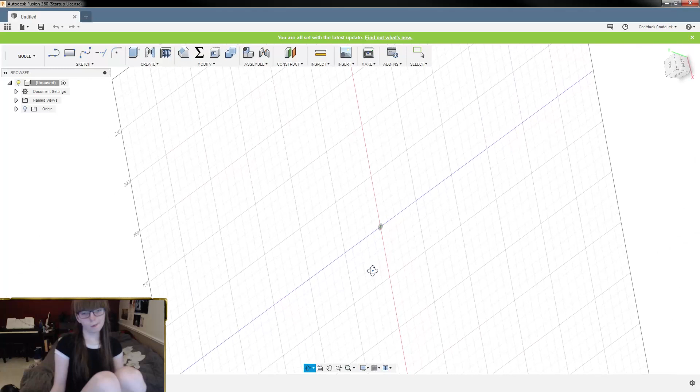Oh, did I? I've gotta have one on my desk. Sure. Did I forget to grab one of the key components that I'm modeling this off of? God damn it. I did. That's fine. I've gotta know where, like, at least 2 of them are. Yep, okay. Don't worry, just had a dummy moment. Auto pusher.

Ravens are love, ravens are life. Thanks, Bree. Also, hi, Bree is what I meant to say. I mean, thanks regardless, but what am I talking about?

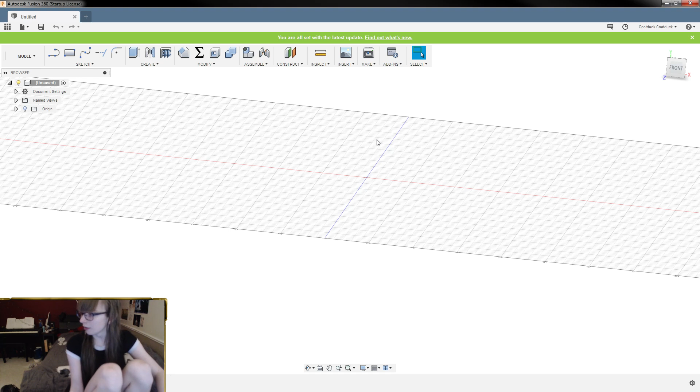And I forgot the Rayven over there. I'm very organized, very prepared. Will this be released? I don't know. I haven't even designed it yet. Give me a break.

Okay. So, let's start off. So I got a Rayven that has been modified. If you hear things rattling around, it's actually got big crystal clear parts in it, because he's such a painfully nice dude that he sent me an extra set and a half when we did Gaben.

But alright, so it's got a little bit of a burr on the outside. I don't want that interfering with my fit up, so we're gonna clear that little section up.

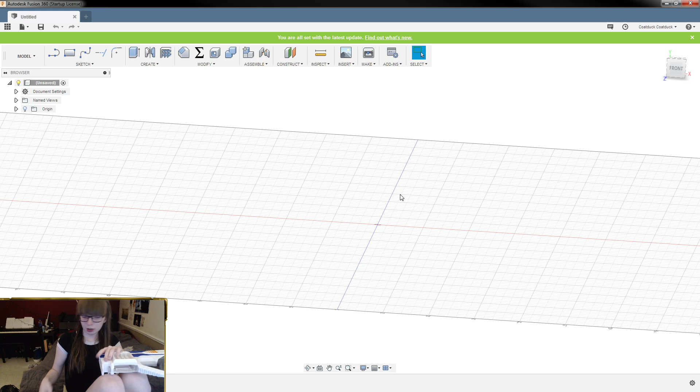Extra muzzle or triggers and rails. I think he sent 2 of everything, and then an extra muzzle and battery, or jam door, I think. I'm not entirely sure. Although I am missing a rev trigger on this one, so it's possible he only sent me 1 extra of those, or 1 of those, I guess.

Good thing you didn't need to go to the supermarket. That sounds like you saying you needed to go to the supermarket, and then I got in your way.

Alright, so that edge is cleaned up. Now let's grab my calipers and start grabbing some measurements off of this. Oh. Okay, so this is 48 millimeters across. Right.

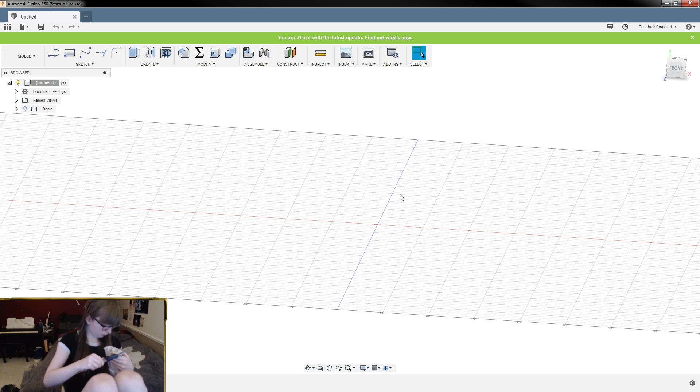Oh, I'm sure I've got a mag laying around here. If I have to get up and get another piece, I'm gonna feel like a real moron. And here I am feeling like a moron. There we go. Mag. We want the pusher to sit at the right height. So mag with a dart in it. Oh, I didn't. There's no spring in this. Am I a big dummy?

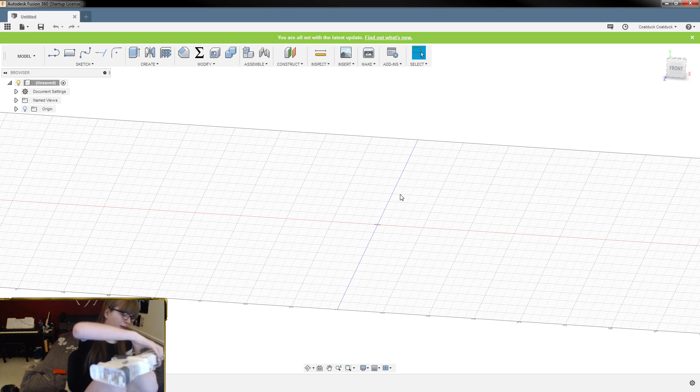Oh, right. The way the Rayven shell works, it has to be screwed together there. Now, I know that comes down on a switch, but I'm not entirely sure where that switch is. And the shell's screwed closed. Of course it is. See, I'm trying to figure out what I have to get rid of and what's necessary.

So, for a sense of context, let me pull up what we're going off of here, because I have a design in mind. So, the purpose of this, now that we have enough people here that I don't have to explain myself 8 times, so the purpose of this is, Rayvens have a useless battery tray. Like, this is not good for a lipo.

Yeah, so, oh crap, where is this? It's gotta be in this folder. There's so many. Alright, there we go. So, I don't know if you can see that. Open the Photoshop file. Oh, that's bizarre. Why is it not showing me layers? Was that to do with that error that I just... Okay, no, it's fine.

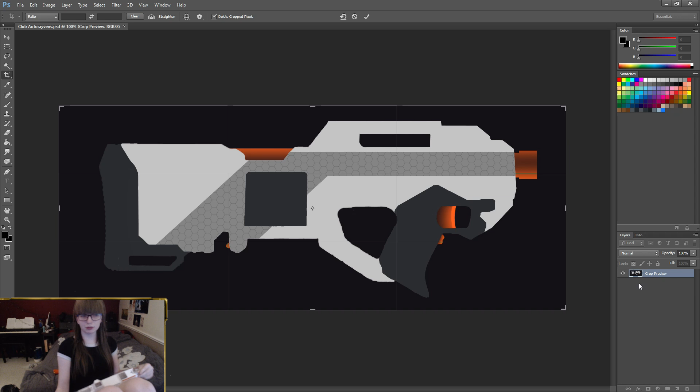Let's take out this background here. So, this shape is roughly based off of the Zeus. Complete brain fart there. But, of course, we can do whatever we want to it. Since we're 3D printing it, we can change and modify it, but I really like the shape and I like the length.

But this is going to mean that we can put in a rapid strike pusher, so you can do an auto conversion if you want to. And it's also going to mean that you can put a lipo in the back, because the bottom is going to be unscrewable, and you should be able to just slot a lipo in there. However, the Rayven is not wide enough to accept the pusher as is, so we're going to have to widen it out and give it a cheek rest.

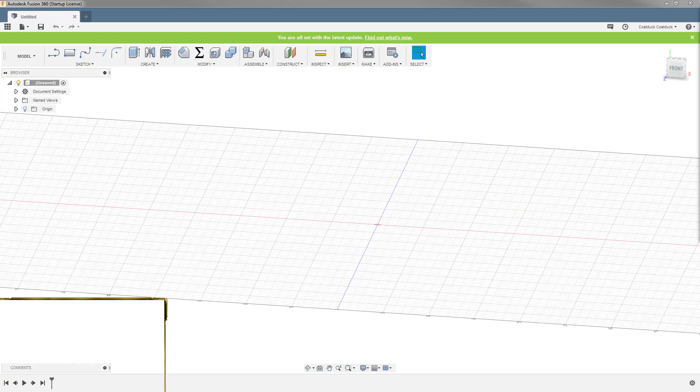I can't do shell modification one-handed, and I'll be fucked if I'm letting this get cold. So let's swap over to CAD and start modeling the back half of the Rayven.

Okay, so basically, what I want to do here... God damn, this is good. What I want to do here is, the Rayven, if you look at it and squint at it a little, it has a distinct profile. So this angle, this looks like it's about a 45. I'll measure it to be sure. Then a drop here, and that drop goes all the way down to a rotation here. So all we have to do is get this profile imported, and then we can design around that based on measurements of how far in we want it to go, etc. Because we've effectively cut away all of the stupid little bumps and whatever.

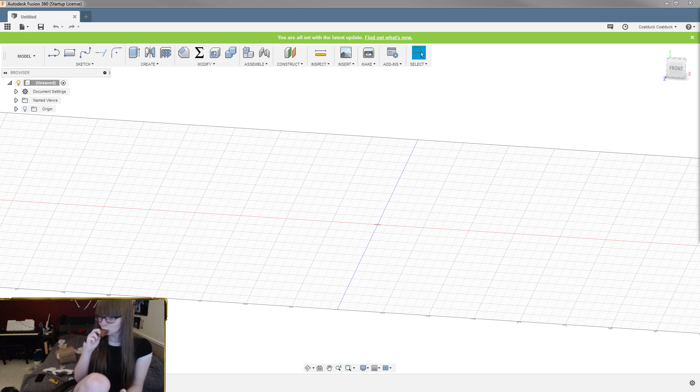At some point, I may want to grab one of my Zeuses and get some measurements off of that. But to be totally honest, no part of this has to actually be a Zeus. Like, I kind of want it to look like a Zeus because I like the way that that looks and I like the way that the two shells work together, but I'm using the wrong hand for this.

Thanks for stopping by, Corv. Oh, I have miso soup too. God damn.

Okay, so we're looking at the front right now. So, oh fuck.

Gotta go watch Primer. That's not exactly light viewing material.

Okay, so I want this to be more or less centered. Although it is tempting to center it around the bore. That would be kind of a pain in the ass, though. Actually, no, it wouldn't.

Don't mind me, just got a Rayven and a piece of Galbi in... What's that? My flowers. There they go. There they are. Here we go. It's a me. Difficult to do one-handed.

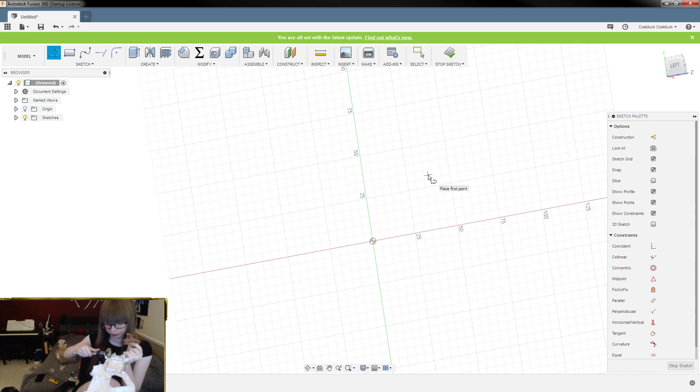Okay, so what do I think? That's 18.5. And then we want to subtract approximately half of the width of that hole. Keep in mind that it's a little large. So we said that was 18.5, if I line that up down. Yeah, okay, so 18 and a half.

Something's not right there. Oh, because it doesn't quite line. 20 and a half. Okay, so 19 and a half is what we're looking at. And that should center the top on the bore. 19.5.

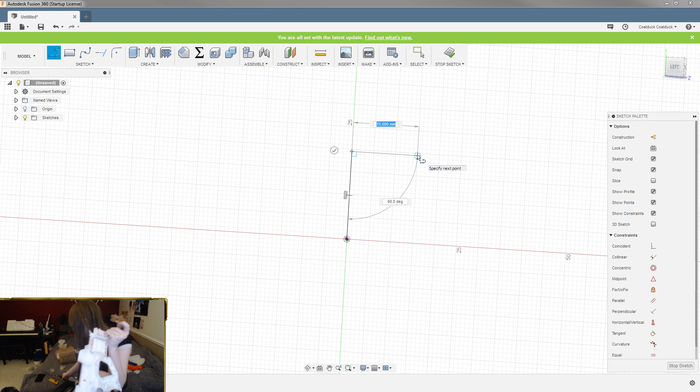I don't know what you're using a micrometer for. But if it's for Nerf stuff, I have used a pair of $20 calipers from the start. And it's fine. It's not incredible, but you don't really need incredible. Even if you're doing really high precision stuff, you don't need incredible. High precision by Nerf standards is like, you know. Again, if you're measuring Nerf shells, you're better off with a pair of calipers rather than a pair of micrometers. At least in my opinion. But there are some talented machinists out there, so I won't. Yeah, you're young.

Did I just do something horribly wrong? Because I'm getting 48 millimeters there. And then when I split the shell in half, unless it's super duper asymmetrical. Okay, no, that's 24-ish. 24 and a half, which is concerning, admittedly.

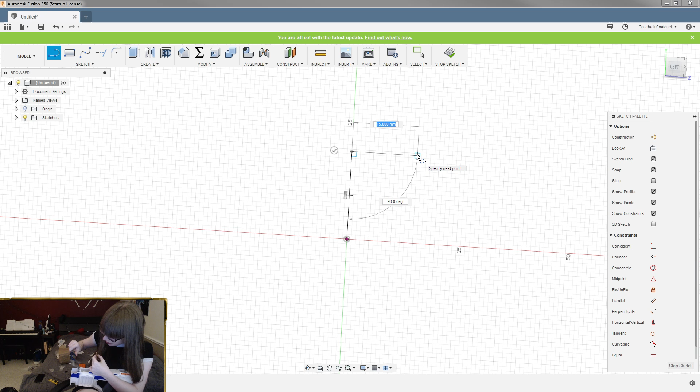Okay. See, since today is apparently the bitch about the Rayven stream, is the shell like 1 millimeter asymmetrical? Because that would be a pain in the ass. Am I just getting this measurement wrong? No, okay, it's 49 if I don't squish it down with my calipers. So 24 and a half based on each side.

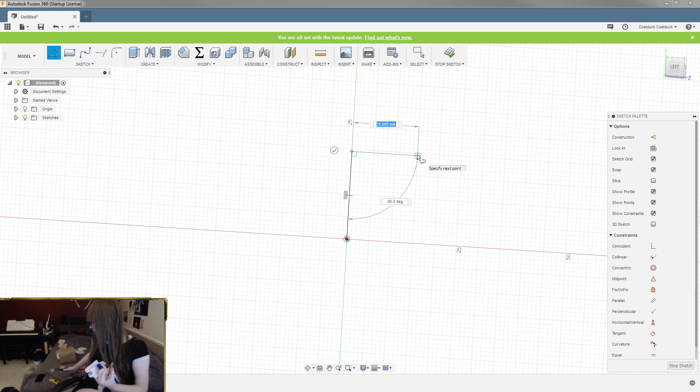Yeah, okay, so 49, and then that makes 24.5 for both sides. Okay. I'm confident in that at this point.

God, Rayvens are beautiful. Well, they have their moments. But oops. This is going to be a difficult measurement to get.

I'm trying to think. See, I've had an idea for a flared Rayven magwell for years now, but I'm trying to think if I've ever had a problem reloading. Like missing the... Because if not, why bother, right? But it's a good idea.

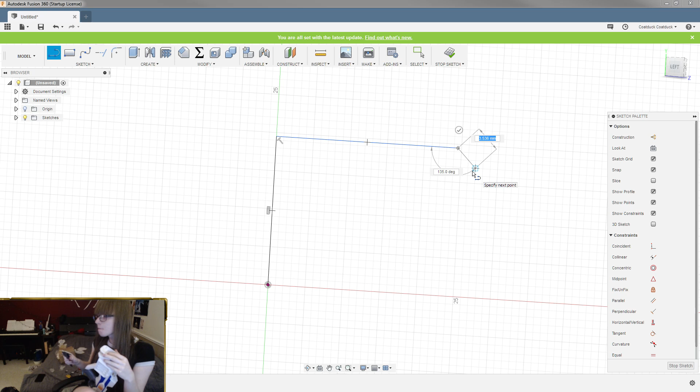Didn't say they weren't a pain in the butt to modify. Yeah, I mean, the Rayven has a lot of issues, spanning a large variety of topics. Aesthetically, there are some things that bother me, but by Hasbro standards, I like it a lot. Okay, so 118 minus, I'm gonna guess this is like 1 or maybe 1.5. One. Dead on. I mean, yeah, Hasbro designing blasters based on somebody else's work, you know.

We want to go down 117, and then back in. So that's really the super basic shape, right? This is the rectangle. So we need to add the chamfer on the top, if I can actually see where the hell it starts.

Okay, that looks like it's 8 mil, and then we can just hope to God that this is 45. Of course it's not. Yeah. No, of course not. So this is 7. 7 in, and... really hard to see what the hell I'm doing. There we go. Using my monitor backlight to find... so 8-ish. Nah, it's fine. 8's fine.

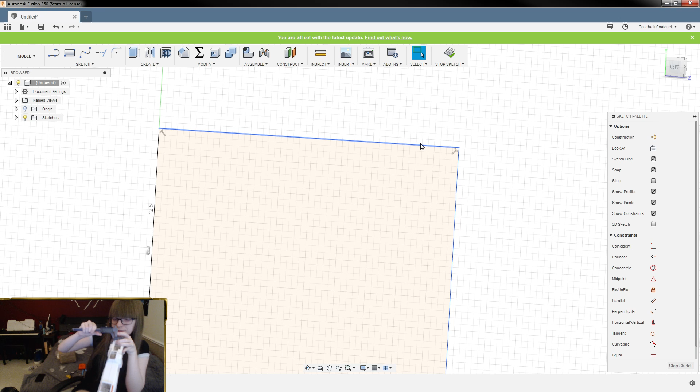So what was that? 7 by 8? Was the size of that chamfer? Nope. 6 by 8. 6 by 8. Alright. So let's come in. Six, and then down 8. Right? And then pow, pow. There. Okay, so that's the top section, right?

So fucking good. Thank you very kindly. Alexa, lights on. I know how badly that swamps the camera, but...

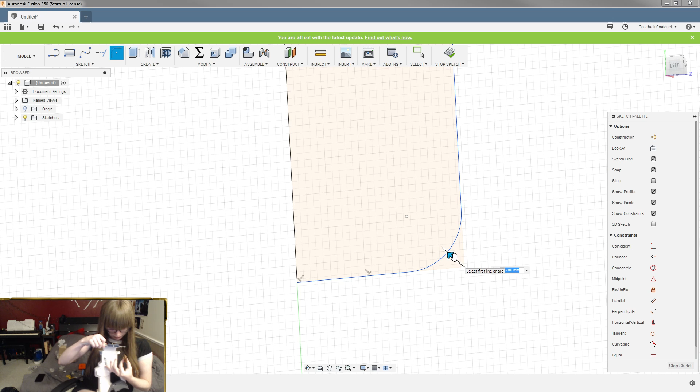Okay, I have a solid theory on how to get the accurate radius off of this.

I need to not be eating Galbi, though. It was heavenly.

Alright. So, what we need to do... Honestly, figuring out how to take measurements off of things is half the battle a lot of the time. Because getting precise measurements off of parts that are shaped funny on the first try is very difficult. And a lot of people just bullshit their way through it. Like, just guess and check, basically. And don't get me wrong, that works, but you save yourself a lot of time if you don't have to make a prototype every single time.

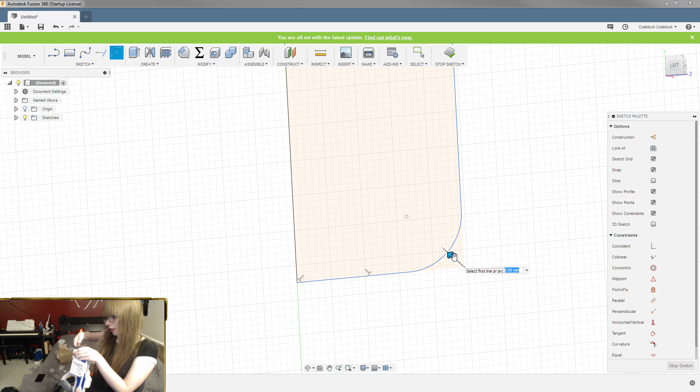Crap. Had it. So, I'm using the calipers to create a flat, parallel surface. And then finding the point where it stops making contact, and then making a mark there. And so that shows where the start of the curve is. And then, once you have where the start of the curve is, which I've just now marked out in gold, you can take your calipers and measure down to that point, which is there, 14 millimeters. So now I know that curve has a 14 millimeter radius. So I can just type that in, boom, done. So that is the profile on the back of the Rayven.

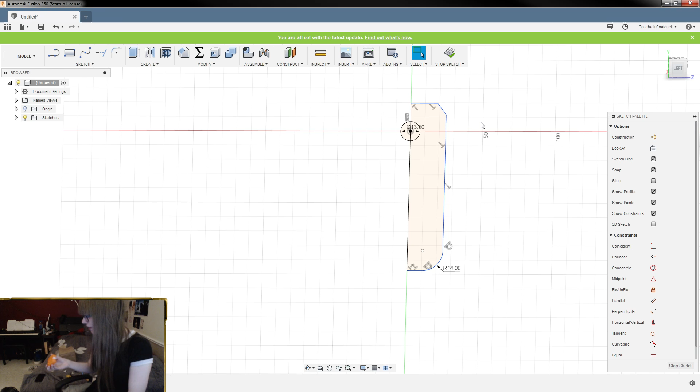Alexa, lights off. So this is your center bore, where your barrel goes. So if I want to throw a circle in there, it's like 13.5 millimeters for a dart. There you go. So now we need to start looking at approximate shapes here. Basically where you want the pusher to sit, how you want it centered on the dart. So I'm going to say I want the bottom of this lip to line up with the bottom of the dart. So then we're looking at making a box that is 17 millimeters tall. Pretty much dead on too.

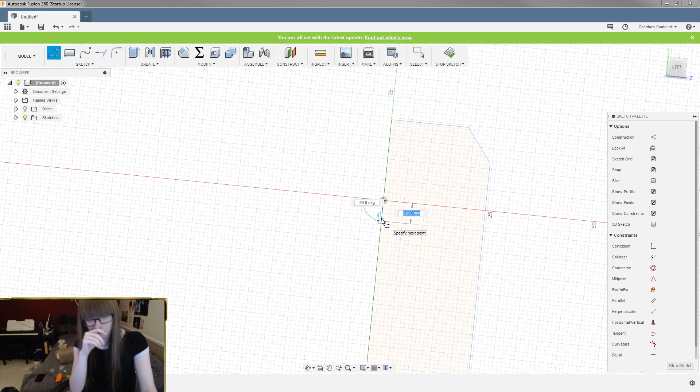So let's stop the sketch and then go to a new sketch. I just want a box, honestly. No, okay, we want a line that comes down, so it's 13.5 divided by 2, so that's 6.75. Brain mixing numbers. And then a box that is however wide this is, divided by 2. So that's 61 millimeters. Again, dead on 61 millimeters. Depending on how hard I squeeze my calipers, I get anywhere from 61.03 to 60.96. So that's dead on. So that's 30.5 right there. And then 17 tall. So that's our pusher box. This is the room that we have to make for that.

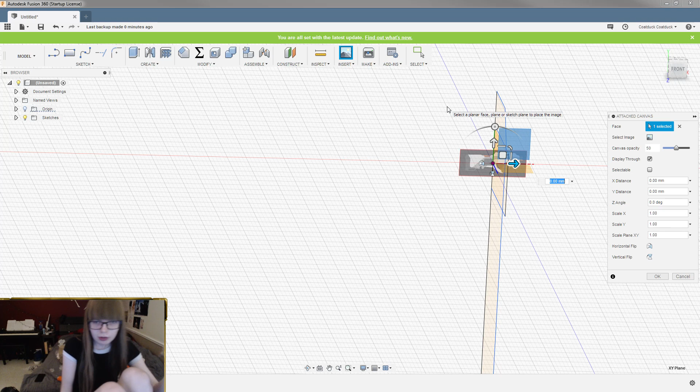Okay. Let's pull in a canvas on that axis. And we are going to use... what do I think? There's a couple different options here. This one's probably the easiest visibility. I want this side to have the screws on it. So I want this flipped in that axis, and then scaled up pretty dramatically. And we'll calibrate this, but for now, that looks pretty much dead on. So that's a little large, but it shouldn't be that big of a problem.

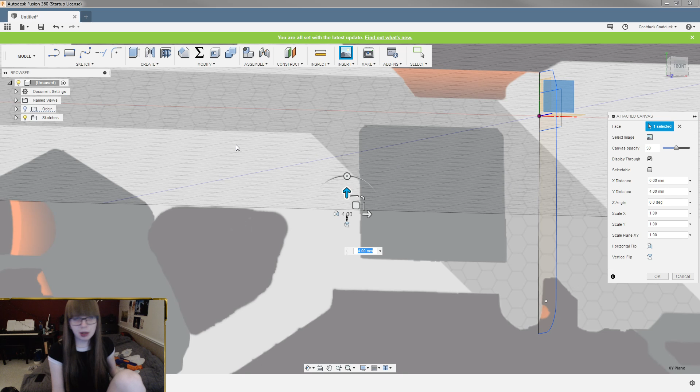See, I don't know how to calibrate this because it's weirdly shaped. Alright, let's do this properly. Okay, so let's calibrate this by saying... yeah, we got this. So we're not going off of this exactly. But let's measure from here to here. So that's 117. Did not remember that number. So then we calibrate our canvas by going down here, picking that spot there, and then the top here, and then saying 117.

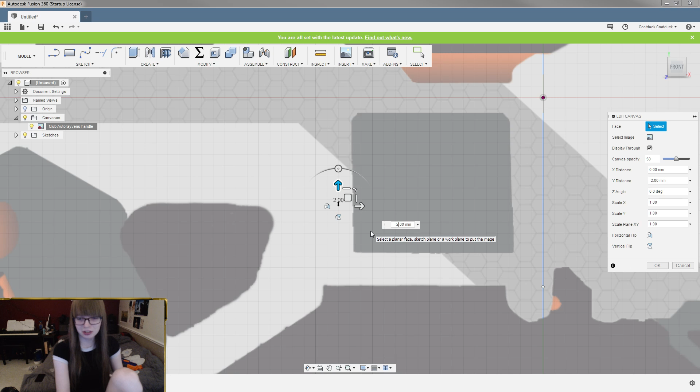And then we lower it like 2. Oh, did I nail that or did I nail that? That was a great guess. So, yeah, looks like it's roughly aligned with the top there and with the bottom there. So that's the back profile of a Rayven, essentially. Now we're extremely simplifying this, which is fine, but we're not going to model anything from the Rayven that we don't need. Just putting that out there. Admittedly, probably more for my sake than for yours. Because if I let myself, I'll model the entire thing, and y'all know it. Everyone knows I'll do that. Okay.

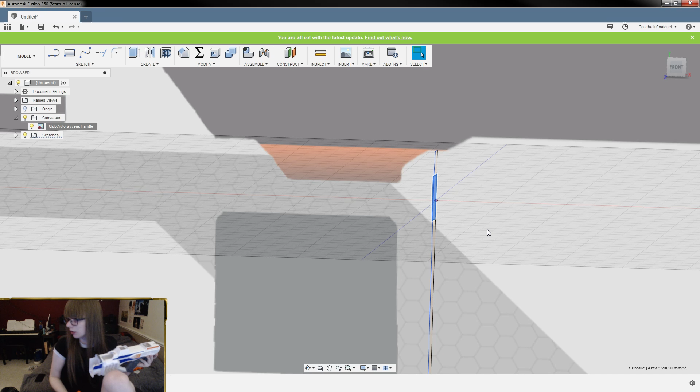That would involve a decent amount of effort. Not as much effort as designing an entire Rayven shell from scratch, but you know what I mean. But think of all the bits you could refine on the Rayven if you modeled the whole thing. Fuck you! I say while eating the delicious meal you've sent to my house. But also, fuck you! Don't tempt me, I'll do it. You all know I will.

I want more food. Goddamn. I can fix the trigger, the stock length. Well, I mean, I'm fixing the stock length right now.

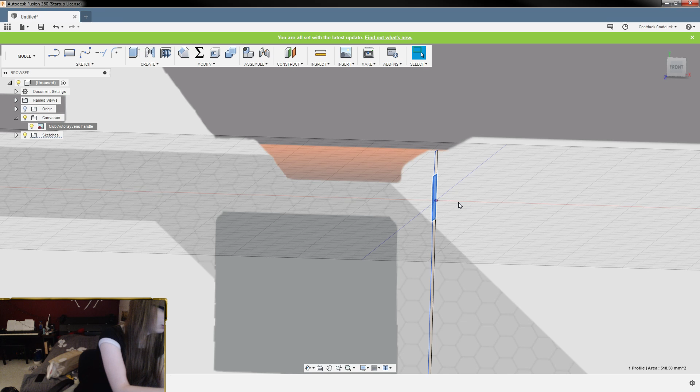Oh, there were chopsticks. A polite person probably would have used the chopsticks rather than tearing into this with my bare hands. Excuse me, I want this miso soup so badly right now. Is this miso soup? I don't think it is. Is that a big piece of onion? Potato. Okay, I didn't expect that. Oh my god. I forgot there were like fucking dumplings underneath this. Okay, so probably pork broth with some potato and green onion.

That's evil. You can't say things like that. I'm not doing it. I refuse. First things first, fuck you. Second, I have to go grab a Rayven box because I just had a thought. Oops. Nope, okay, alright, we're safe. It's fine. We're all good. We're safe. I don't have to do anything stupid like model a whole Rayven.

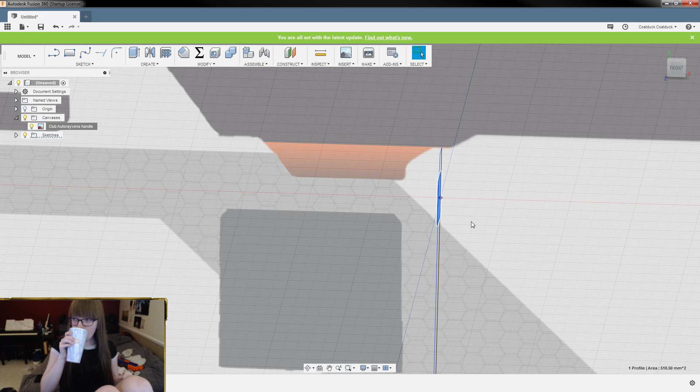I'm not scanning inside of half the shell. So the thing about 3D printing shells is because I designed my shells to be printed flat, like so, you can't have anything protruding past the center line. However, when Hasbro does its injection molding, lots of little things come past the center line, so that becomes a bigger problem. So if you wanted to do that, you'd pretty much have to sacrifice a Rayven by going through and taking any piece that comes past the center line and just chopping it straight off. And then if you had a scanner that was large enough, you could do it. God damn, I'm like a professional or some bullshit.

Alright, I'm gonna give myself some extra room here and measure. Nope, gotta go the other direction because it's asymmetrical. 82 millimeters, front to back, is the center area. So that's the main portion of the auto stock. I'm gonna turn off this grid.

Now, I'm modeling this oversized, extremely intentionally, because I want to make sure that... damn, I could make this much smaller if I was designing it. Oh no. I could design a Rapid Strike pusher reshell. So you drop the internals of the Rapid Strike pusher in. I mean, I'm not going to, but I could. Okay.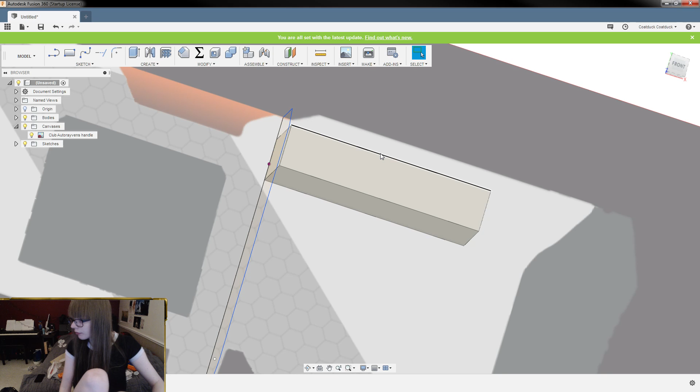I'm starting to get the feeling that it might actually be easier to just model the pusher box. Like to do it properly, rather than try and get half-assed measurements out of it. Okay, so it's 96 to the back. Turn off this canvas just to make things easier. Okay, 8.5. Yeah, that's right. Okay, that is 82. And we decided that it was 90 something? 96 to the back? Yeah, 96 to the back. So that's 14 forward from that point. And then 21 down.

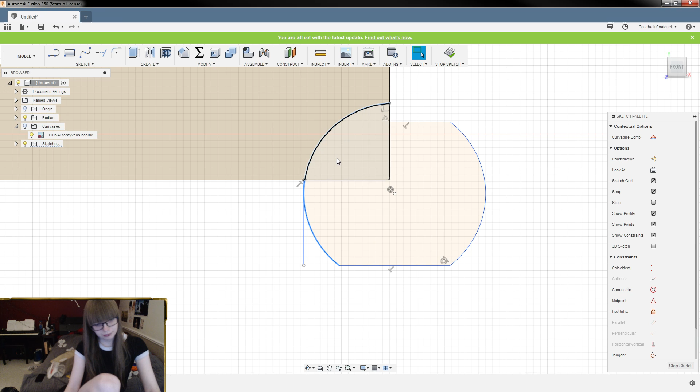And then that has a radius, because it is technically a rounded part. 26.5. Boom. So let's trim off that and that. And the rest of this can be deleted. Oh, actually I should have trimmed that as well. Alright. So that's roughly the shape of an auto pusher. Push that back to there.

Who's pushing the auto pusher?

So let's mirror this body and then combine. And so that gives us a rough shape of the pusher box. It's not right, but it's pretty close.

Ed, I hope you watch this far. If you do, I want your opinion on that length of the stock. Because it looks a little long to me in hindsight.

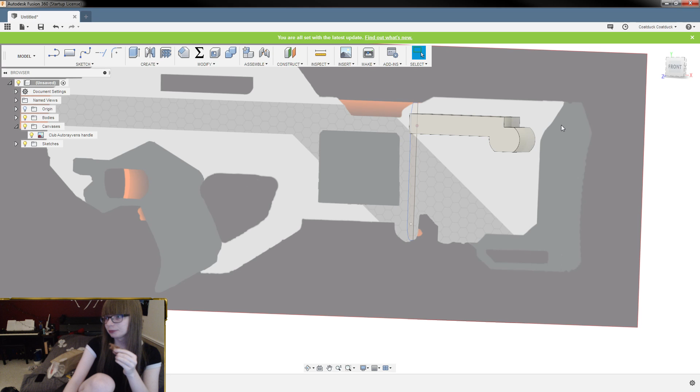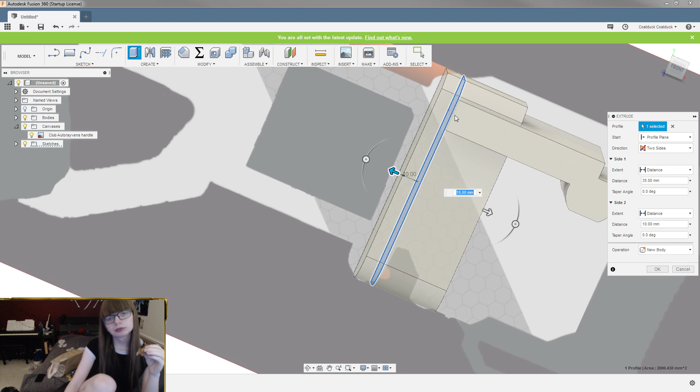I think you meant Alphabet Trooper. Yeah, okay. That's awesome, Razor.

Yeah, that's looking like it's about the right size, like compared to the pusher. If you're not adding a barrel and foregrip, it shouldn't be too bad. Well. I mean, there is this. Which I have partially done, and I know you've held it, actually. That's what I originally designed this stock for.

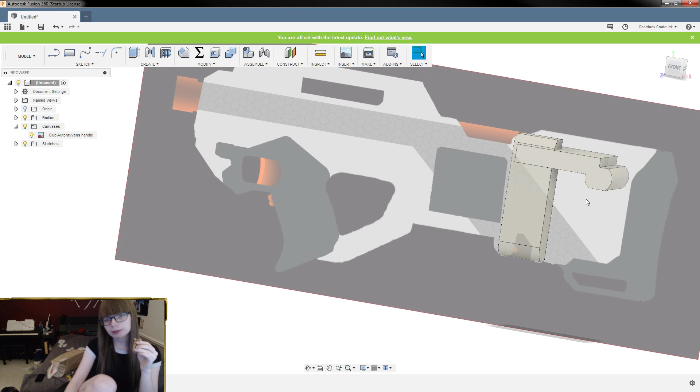Okay, I actually do think it's important to get, like, the actual size here, right? Which I knew was gonna make some people angry, but... fuck it, I do what I want.

Here. Actually looks like it's pretty much dead on. Yeah, 78.5. That's right. Okay. So let's find the center of this. Hello. Hold on. Canvas. 78.5, we said, right? So 78.5 divided by 2. 39.25.

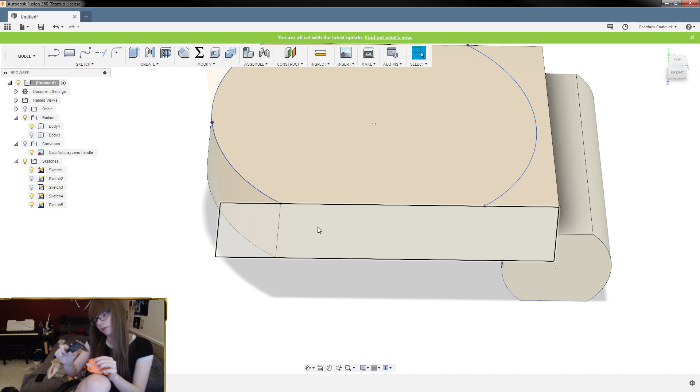Back. It's like the start of that. No. 27. Okay. 2.5 up from the bottom. 23 back. 2.5 plus half of 8, so 4 is 6.5. And then 19 back.

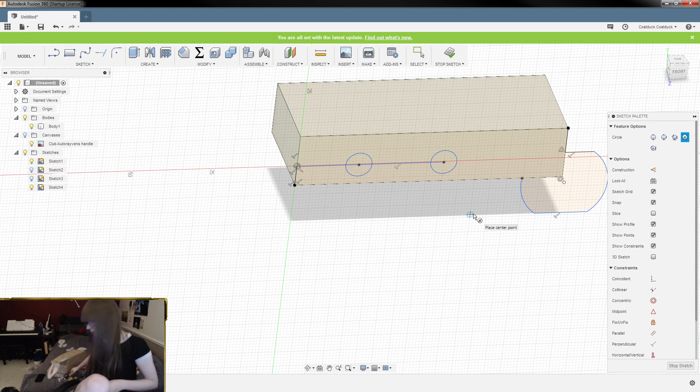And then let's go to the next one. And then subtract 8 from that. And we can get both of the locating pins on the side. 24, or 44. So 36. So subtracting 2 times 1/2 the radius. Or diameter. Or something. That's gotta be wrong. There's no way that's right. How did I fuck that up? So center to center, that should be 36. Oh, 26. Yeah, okay, that would make sense.

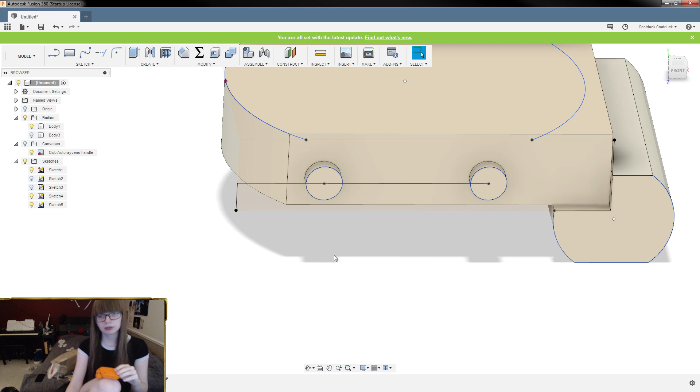You know what? That still looks wrong. It's because it is wrong. Definitely, right? This is 3 millimeters, so... Yeah, that's way wrong. How did I fuck that up that badly? Three back from the front of this. Right? No! Oh, fuck. Yeah, that would do it.

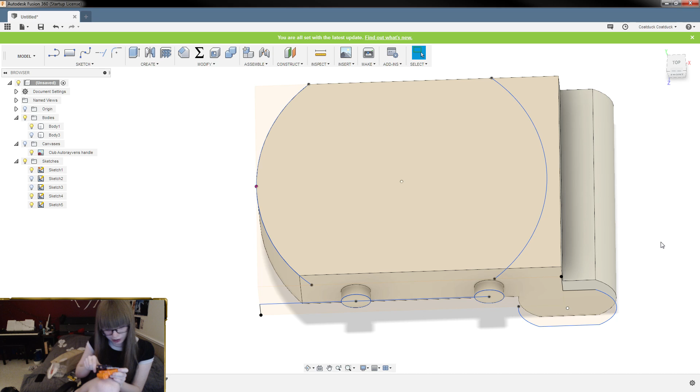23. 23 there. And then 36 here. Wow, I really fucked that up, didn't I? That gives us our locating pins. And then this is... what is it? Four back and 7 in, I want to say. Yeah. So... 4 plus 3 is 7, so 7 and 7.

And then these screw ports are like 7.5. That's like 1000% wrong. I know that's wrong. Yeah, those need to be... That's the 7. Oh, that's the 4. Okay. I got that wrong. So 7 plus 3 is 10. So we're going 10 in here.

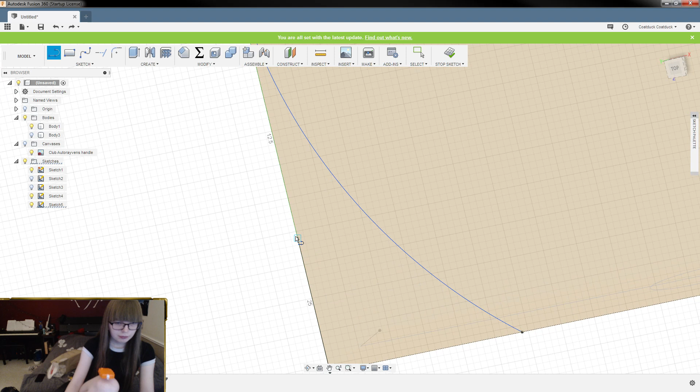And then 4 in here. And then this is 7.5. And then if you assume that gets rounded out a little. That looks about right. That looks close enough to right for our needs. And then let's get rid of that. Oh, okay, did not like that. That's fine, we can just put those fillets back.

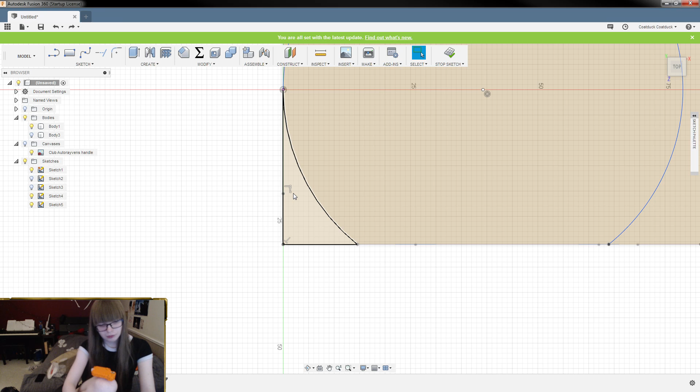Feels a little wrong to me, but not wrong enough that I'm gonna get upset about it. Like maybe that's actually like 4.5 back in. Would probably be enough to throw. It is. It's 4.5. All right. Yeah, okay, fair enough. Yeah, okay, so then let's delete this and this. Oh, and it's gonna make me put those chamfers on again, isn't it? Why do I do these things to myself?

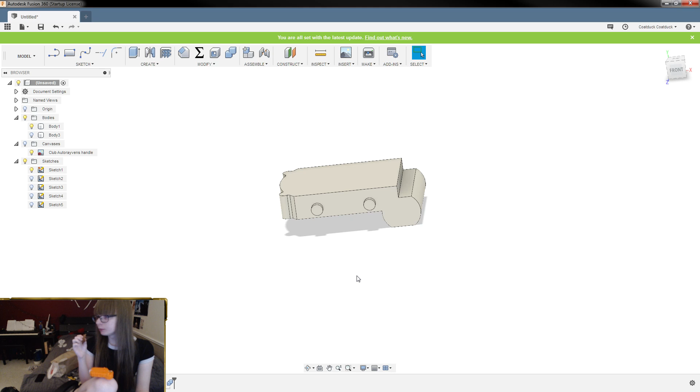There, so now we have a rough model of the Rayven auto pusher. Or Rapid Strike auto pusher, or whatever.

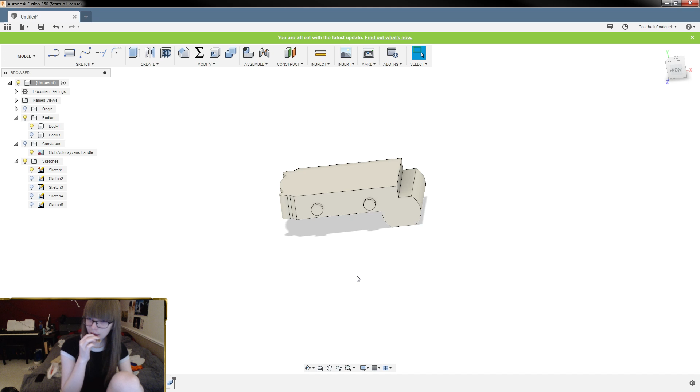Okay, so let's bring back that canvas. So it's definitely longer than ideal. I'm happy to shorten that down a little, but a certain amount of that does have to be used by the, like, the battery tray and the pusher.

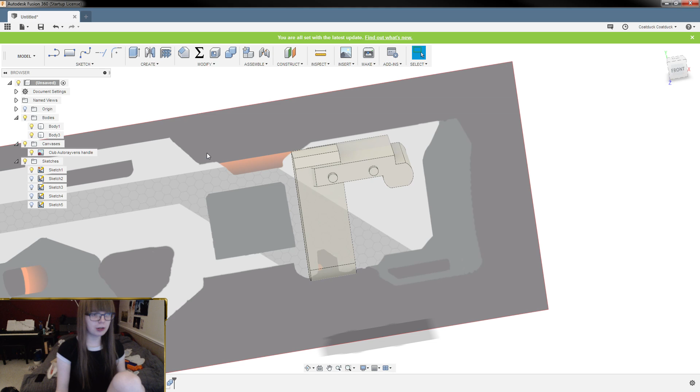Okay, so what do we need to do from here? Let's make things a little easier by coming in and hollowing this to make it a little more representative of the actual shell. So, what's the actual shell like? It's like 1.6 mil thick. 1.75 on this side. Thanks, Hasbro. Great tolerances.

You know. Okay, that's 1.5 on this side. 1.75 on this side. Fuck's sake, Hasbro. Like, there's not even a burr. I've deburred both sides of that, and it's still wrong. We're gonna go with 1.75. I'd rather go a little too thick rather than a little too thin. 1.75. Excuse me.

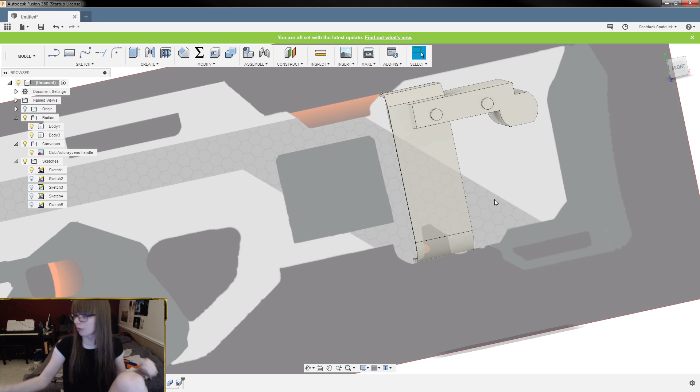I think I need a Zeus. Yeah, okay, so I gotta find a Zeus. I know where both of mine are, roughly, but not exactly. Alright, I'm gonna move everything that could go horribly wrong as I do this. Oh, and it sounds like something's going horribly wrong anyway. Oh, there it is. Come on. There we go. Zeus acquired.

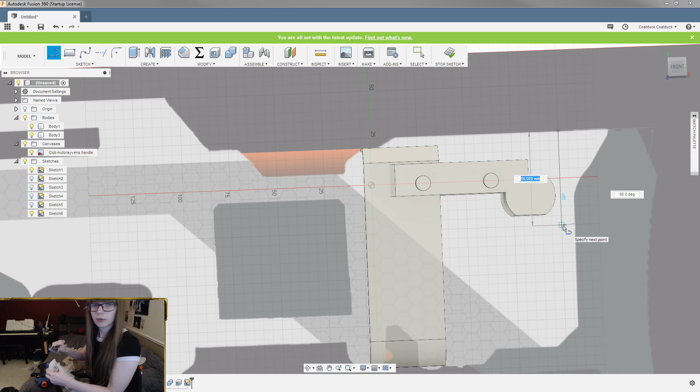Yeah, okay. So this battery, which I'd be happy to run, it's a 1 amp hour 3S, 130 burst, so it should more than handle what I'm going to be running through it, at the very least for HVZ. And this guy, oh yeah, that's no problem. That does mean we might lose the lighting functionality, or at least a majority of it. Unfortunately, that's just how it has to go. Yeah, okay. I can live with that. There have been worse things.

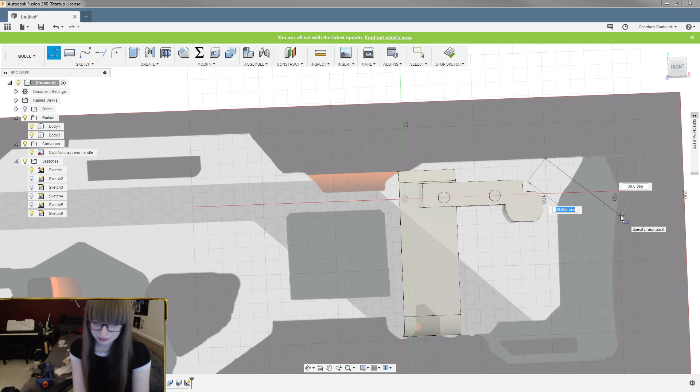I gotta say, this is working out better than I could have expected. I'm happy about this. I know the sizes matched up roughly in my head, but this is pretty dead on. Let's go back behind that, and then we'll look at what these radii are. Honestly, I want to say like 4. Yeah, that's probably 4.

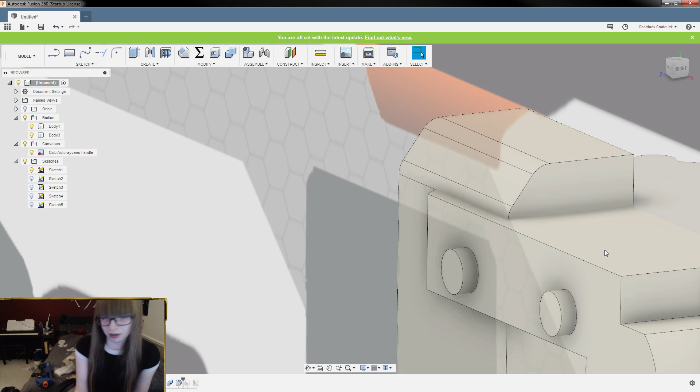Yeah, okay, so all right, let's just go at this, right? That gives us a little bit of a radius on the inside, and then, oh, okay, well that's that then.

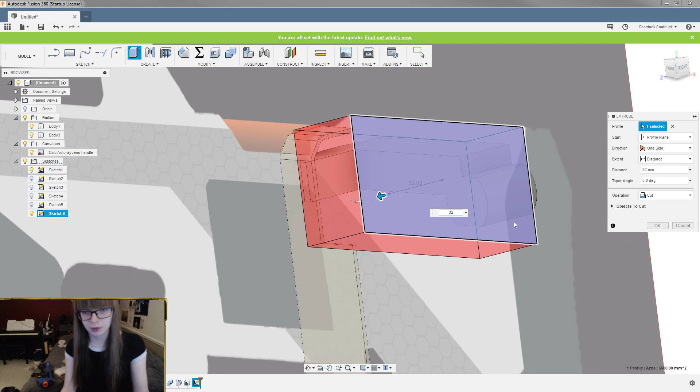Alright, so what we're gonna do now is, okay, we're calling this shell thickness 1.75, so 32. Yeah, we'll do 32, and then if we need, we can cut out a little extra from that area where it locks into the shell. That's not a problem. So this is going to be a new body. And then we're going to experiment with this cheek rest and see how to get to a point where we like it. Probably want 2 distances.

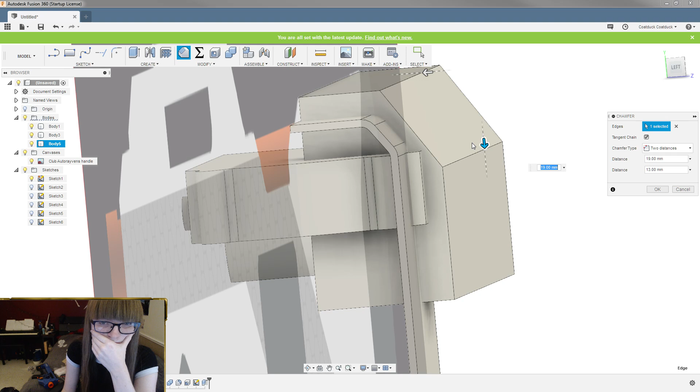So there's your shell. I really don't want to come down much further than that. We do though. Yeah, we definitely do. And we're just gonna hope this works out, I guess. Jeez, I don't know how I feel about this. Part of me is tempted to pull it out even farther to give myself a little more wiggle room. No, 20 is too much. Actually, 20 might be about right on this.

Although, since the only bulge in the pusher is mostly up here, and then there's a little bit down here, if we make it all the way down there, I can see that being an issue. However, if we want to just, like, fucking... Yeah, 15. Okay. 32. So that means to get 15 remaining, we want to go back 17? No. Wrong side. Damn, that was good. 17.

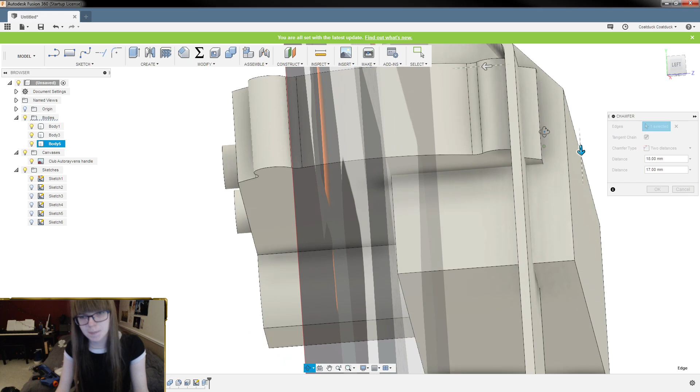Part of me really wants to match that angle, but then if we do that, you see the problem. We could always kick the cheek rest up a little bit. Okay, I got a Rayven over here, and I'll just see where my face wants to sit on it. And then we can determine the height of the cheek rest. I wish there was something right there. It's actually not far off, but I wouldn't mind it being a little taller.

Yeah, because as it is, my face is sitting... I can't see the camera like this, but my face is sitting here, that far forward. So I'm probably not even going to use that cheek rest area, unless it's substantially...

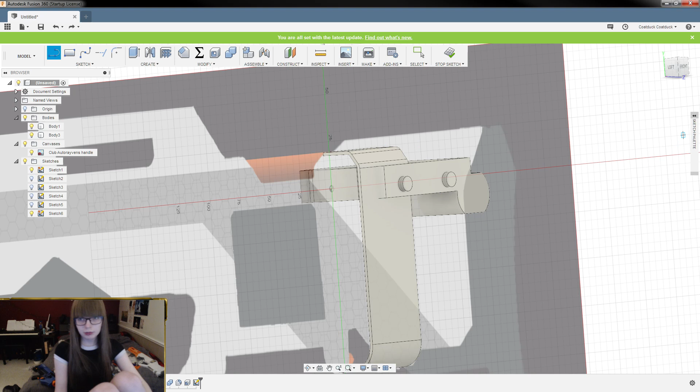Okay, so let's go front. See, I don't know. It's kind of fine as it was. The pusher sits too high is the only problem. There's not a lot I can do about that.

Nope, piss off. Piss off. Okay, fuck you, apparently. Let's go 30, 32. New body.

What if the cheek rest was more a back of the head rest? Bizarre, but possibly. See, this is when I'm really wishing that Edscar was around. Also, I am not at all sure what this is. Pretty good, though.

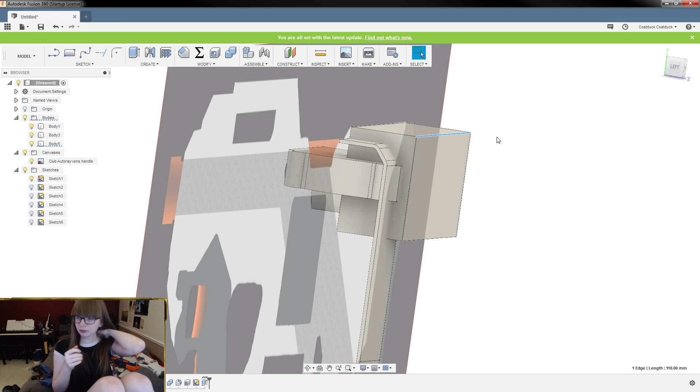Recently I've discovered that, without fail, tofu gives me heartburn. No idea why. But it's predictable. I sort of just assumed it was a coincidence at first, but

Okay, so this should be like 17. Or it could just be wider at the top, which wouldn't be a crime, I guess. Nope, not what I wanted. Okay, now, what is the distance between here? Nope, here and here. Fuck you! Here and here. Hey. God, that took way more effort than it had any right to.

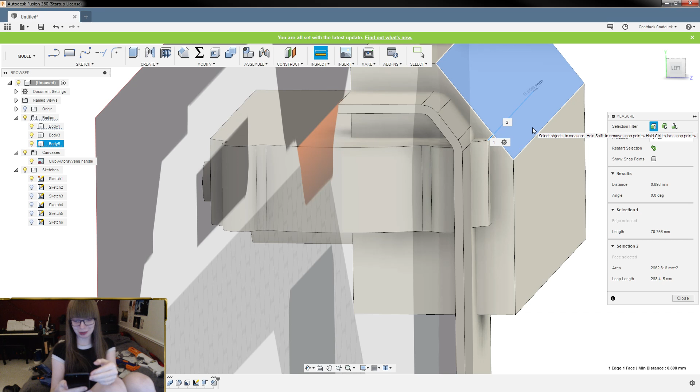I just got a message from Rob Lair that started with, "Dear Diary, we must discuss the dicks. My wizard wand, Hogwarts Longbottom the Third." You know what? Not reading the rest of that. That's as much as I want to read. Are you allergic to soy? I hope not. That would suck. Also, hi, cat. I like it, is the thing. I like soy things. Then again, I liked pineapple too until I found out it was trying to murder me. Okay, that's being dramatic. Tofu has nothing specifically against me. Hey.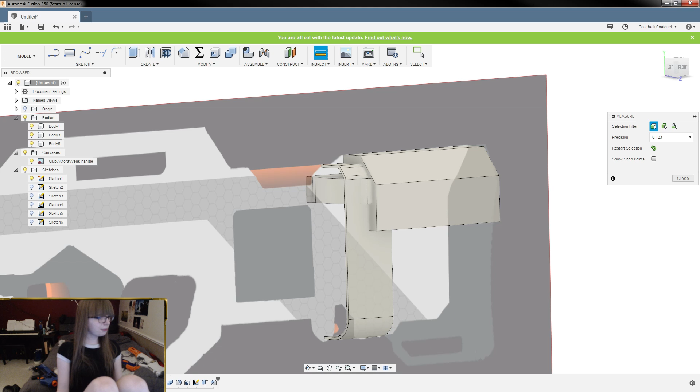Okay, I'm gonna pull this up and see how this line is supposed to line up here. And maybe that will help convince me. Hey, come on. Oh. That was 5. And that gives me plenty of room. So I still have that angle. It's a little higher. 5 mil higher.

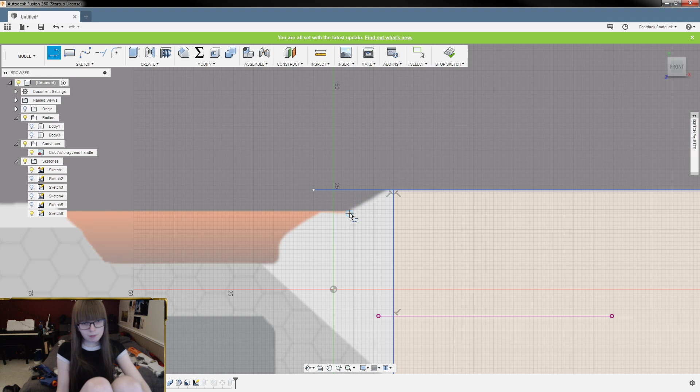Let's turn off the other two just so it doesn't freak out at me. Excuse me. You know what, let's make this nice and go for like a 30-degree angle. Why? Why are you like that? 30. And then, and this. That's bizarre, but okay.

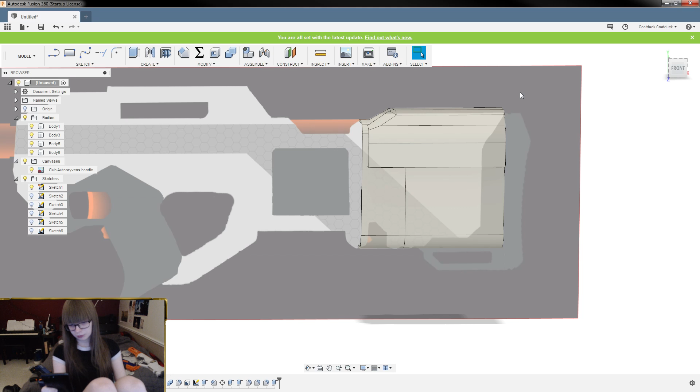I think, before I make any final decisions on this, I need to spend some more time looking at the components and just figuring out the shape in my head, and maybe bothering Nathan about it, because Nathan is very smart. Whoa, that was quite the fillet right there. See, I don't like that angle. We can do a redo. That shape there is important to me.

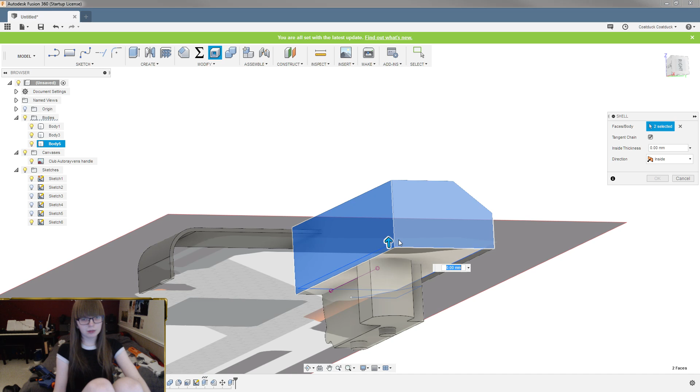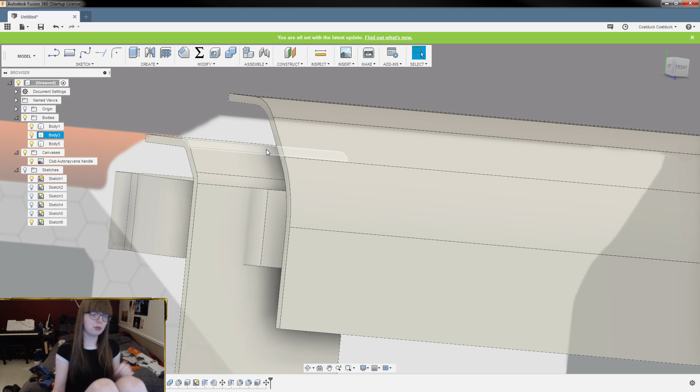Let's do one of these. And then we want this 1.75 to match the rest of the shell. And we have to figure out how to connect these. So, on the original, on the Zeus, it actually doesn't have any sort of slope on the front, and I kind of dig that, but I don't know how to translate that properly into this design, because you have this slope here, and I'm sure that there's a way that you could do that. It's just I'm not entirely sure how.

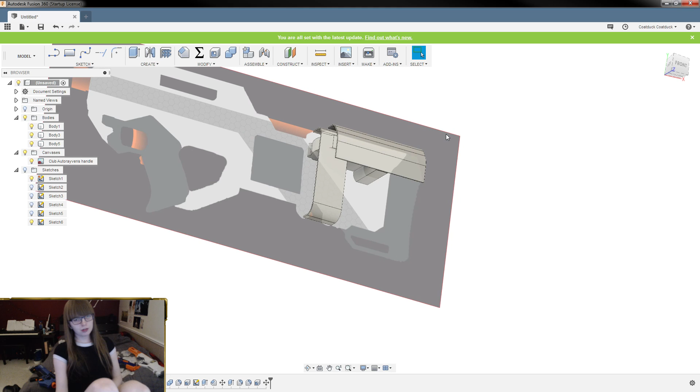Is Nathan secretly lurking and willing to help me? Hasbro will make a full auto bullpup. Probably not. Hasbro has like zero consistency. Yeah. I don't know. Maybe. Who knows?

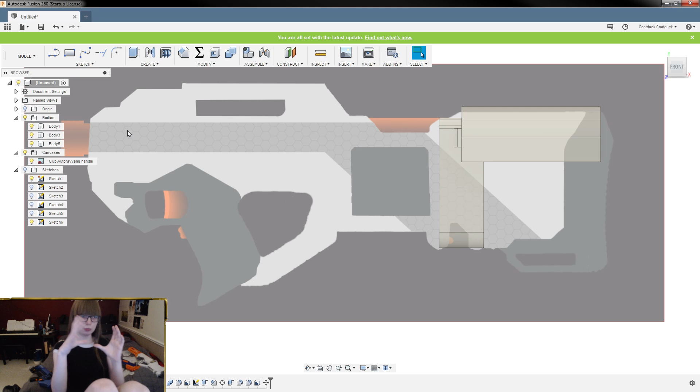Soap mask. I don't think soap masking is going to be very practical for doing this pattern. Actually, if I'm being totally honest, I think the best way to go about this would be to laser cut a mask and then do it that way, because I really don't think, like all of the options I looked at for doing this, you can get like hexagonal webbing and just lay that over top, and you can do hydro dipping, but the problem is, as they start to move, they warp, right?

Whereas with a mask, you could either make this grid, and then lay it down so that it's nice and solid all the way across, and lay that over a darker thing and then spray your lighter over top. Or you could do your lighter and then basically use a transfer mask to do the hex all the way across it. If only you had a laser cutter. Yeah, about that laser cutter. That thing may genuinely kill someone or blind them badly, so I'm really hesitant to use it.

I'm kind of tempted to make a dedicated machine, or like a dedicated XY gantry, but I'd have to get some V-slot extrusion and design that. I mean, not that it would be terribly hard. An XY gantry is... I could pretty much do it in my sleep, if I'm being honest. I've already got most of it designed in my head. But I have to do that and get the parts for it, which I might do. It's not a terrible idea. But I need to source some proper V-slot, and then figure out what dimensions I want it to be. Grab some belts. I think I have the steppers laying around. But I could do lots of different woodworking with that, like laser engraving.

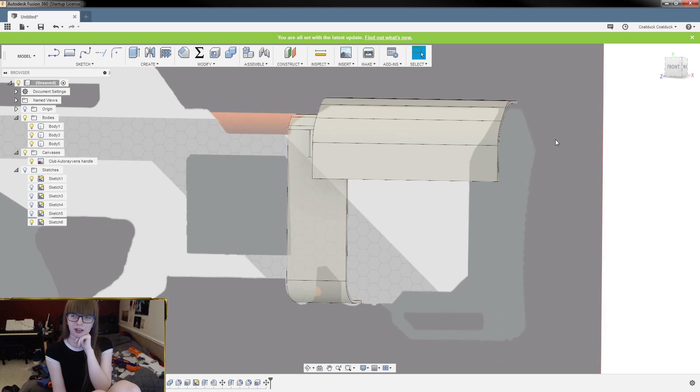Plus, I think with a vinyl cutter, the blade would wear down really quickly going through masking tape. It's like how if scissors weren't designed to sharpen themselves as they cut, they would go really dull really fast. It's like cutting paper with a knife is really bad on it.

Alright, well, I think I got a really good start on this project, but I have to admit I'm at a loss as to what to do next, just because this transition here between the cheek rest up here and the rest of the body, it's not quite right, and it's bothering me.